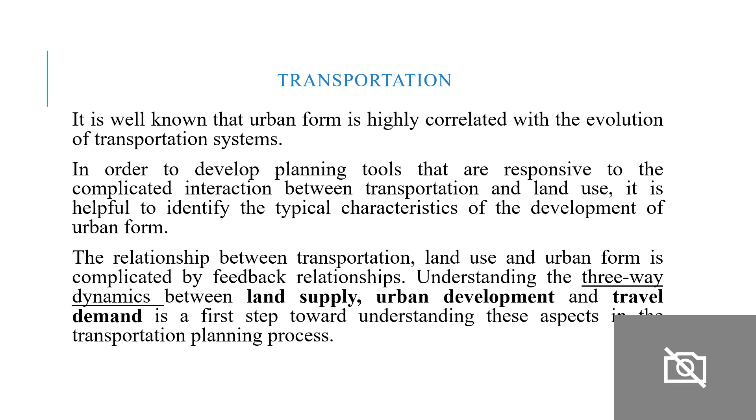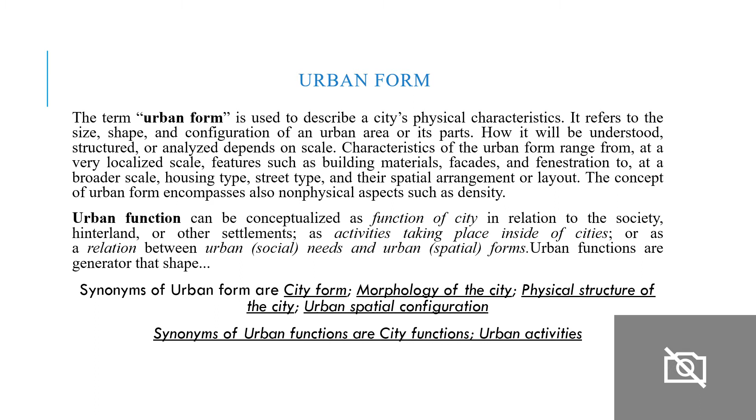This considers the location of different activities, the central areas and the periphery. The central area is a cluster of central activities which we call the CBD. The core activities are those of the highest order in the urban spatial structure, like finance, insurance, etc. Then come the central activities which focus on production, distribution of activities such as manufacturing, wholesaling, transportation. The peripheral activities are primarily residential.

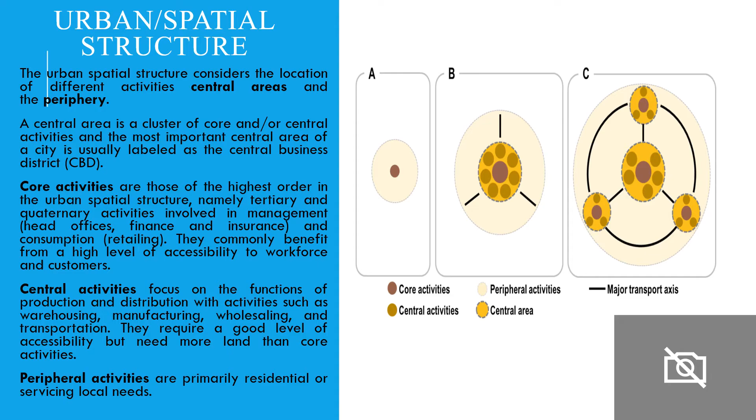Each city has its own evolution and urban spatial structure that has developed. We'll look at it in three phases. The pre-industrial city existed before the industrial revolution, and the CBD was limited to smaller sections like the market area where transactions were carried out.

Then the mechanized city came in with the industrial revolution, starting mass production and mass consumption. The retailing and wholesaling part of the CBD started, in the first half of the 20th century. In the second half of the 20th century came the mobile city, in which massive industries relocated away from the central areas to suburban areas. The spatial structure of many cities then became increasingly multi-centric.

Before going further, we are going to use certain terms again and again. The term network refers to the framework of routes within a system of locations, also called nodes. A route is a single link between two nodes that are part of a larger network, referring to tangible routes such as roads and rails. A transport network denotes either a permanent track or a scheduled service.

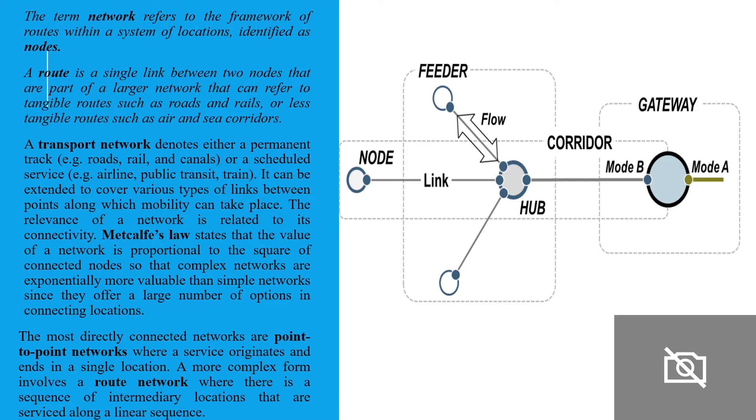Connected networks are point-to-point networks where a service originates and ends in a single location. A more complex form involves a route network where there is a sequence of intermediary locations serviced along a linear sequence. Transport hubs have emerged as a common network structure for many types of transport services.

To understand the urban spatial structure, we can categorize it under two levels. One is centralization, which refers to the locational setting of activities in relation to the whole urban area. A centralized city has a significant share of its activities within a defined center, while a decentralized city does not. Clustering refers to the locational setting of activities in relation to a specific part, that is a focal point.

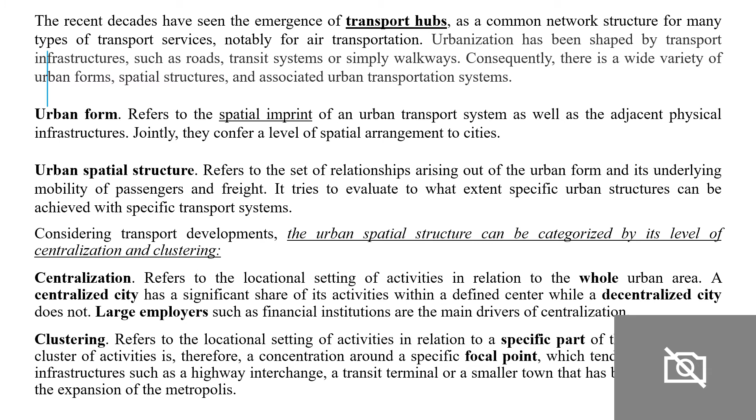The spatial structure has two structural elements: the nodes and the linkages. The nodes are reflected in the centrality of urban activities, related to the spatial accumulation of economic activities. Nodes have a hierarchy to their importance and contribution to urban functions. Linkages are the infrastructures supporting mobility to, from and between the nodes, like streets.

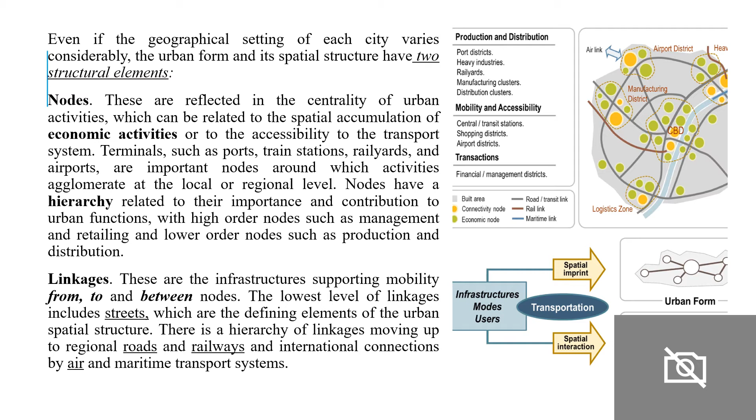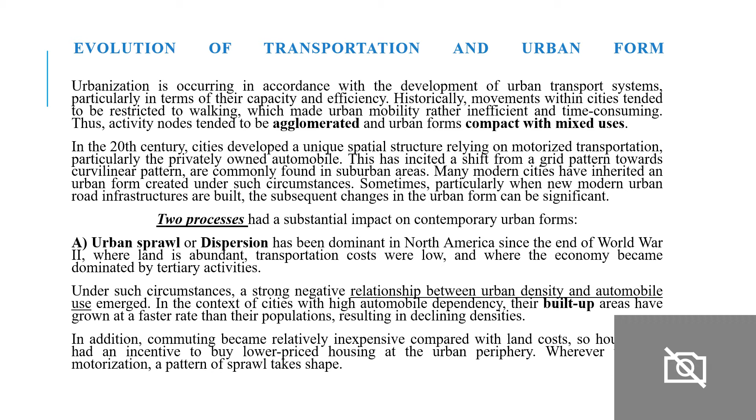There are two processes which impact urban forms. One is urban sprawl or dispersion, dominant in North America since the end of the Second World War. There are built-up areas which have grown faster than the population. Urban sprawl is taking place in many different types of cities, such as Paris, London, Mexico.

Recently urban expansion has consequently almost all geared up towards road transportation as the support for mobility. The second process is the decentralization of activities, which has two opposite effects. First, commuting time has remained relatively stable in duration, and second, commuting increasingly tends to be longer in distance, made by using the automobile rather than public transit.

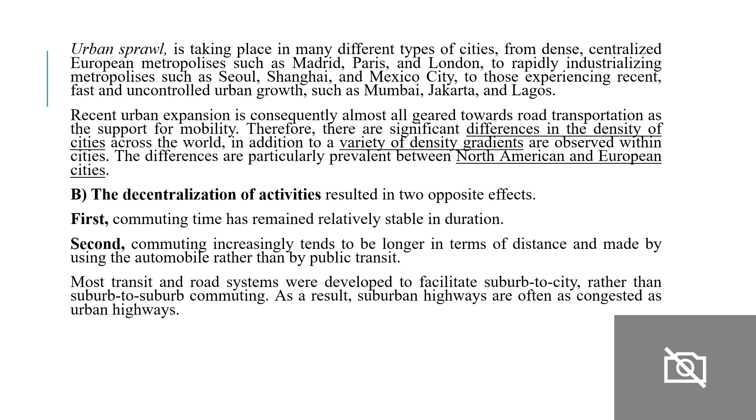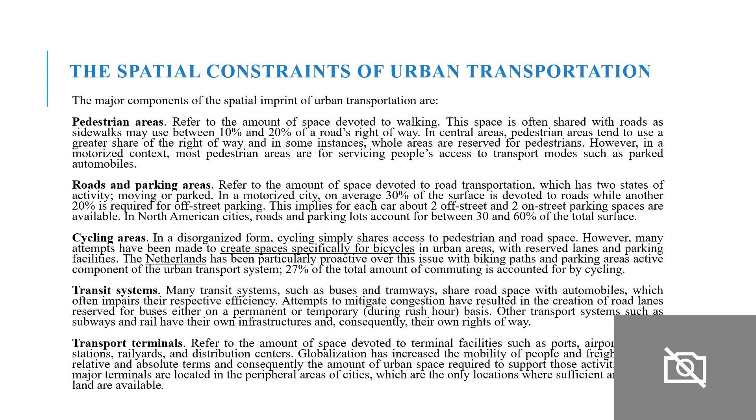The major components of the spatial imprint of urban transportation are pedestrian areas, the sidewalks on the roads, which contribute 10 to 20%. Then are the roads and parking areas, and also cycling areas are coming up. The transit systems are not exactly present in India, we don't have subways. Then there are the transport terminals.

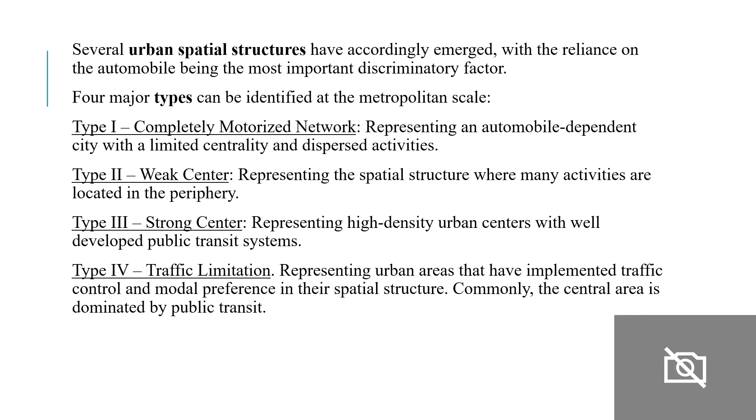The urban spatial structure has been changed because of automobiles, and four major types at the metropolitan scale have been identified, named type 1 to type 4: completely motorized network, weak center, strong center, and traffic limitation.